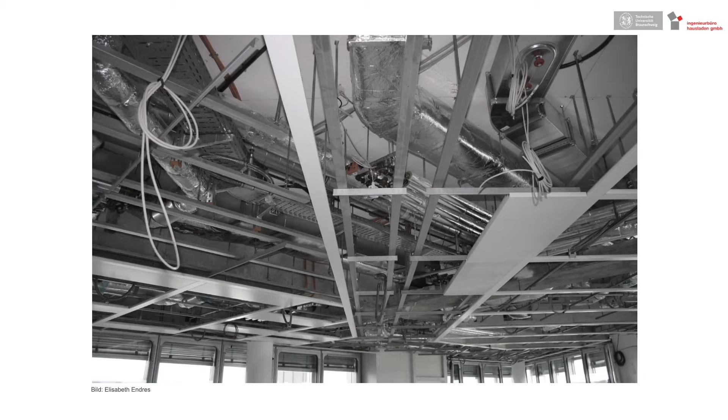I think there are two points why we are still doing architecture like this. By doing the professorship, I'm also always in the managing board of a company called IB Hausladen, and we are trying to avoid technical supply systems and have more talent in the architecture. But it's sometimes hard because there are not always high talents in the architecture, and robustness coming out of the plans, out of the floor plans, out of the height of the rooms and so on.

For that reason, we sometimes need technical supply, and on the other hand, we have a lot of requirements on comfort as well, what we as human beings need. So for me, when we go into monitoring and look at passive houses, for example, we always find that a lot of people live there at 24 degrees and more, and open the doors with a t-shirt on. I think it's very important nowadays to rethink about human requirements - what is comfort really, what is measurable comfort, and what is comfort from having a good surrounding.

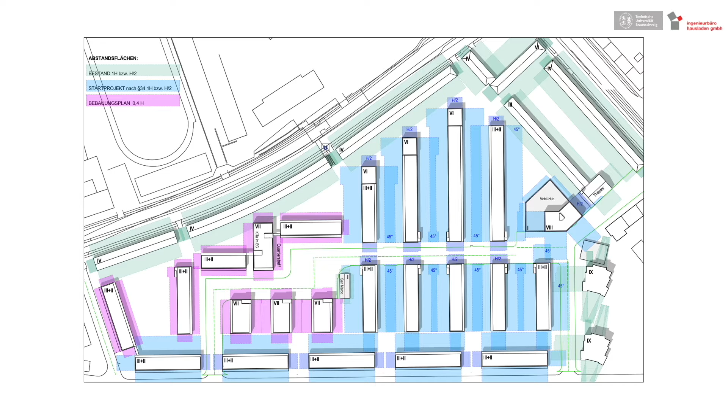This is a place in Munich, a 1970s residential building, and the question is what to do with them. You can see here a very normal district - we have hundreds of those in Germany, and there are qualities, but we always say there's no quality, and that a new building is always better.

I think we have to rethink that it's not always a solution to make a new building, but also to look into these quarters. And there are different qualities. You can do a lot of transformation over there without having a new urban law.

You can ask the people that are living there. They are very lucky to live there. They're living there for more than 40 years. But we, from the perspective of architecture and engineering, we always say, oh, they need too much energy, they are old, they have to be restored and so on. But if you talk to the people—I was sitting Sunday on the playground talking to people—they're very happy to live there. So it's also a quality.

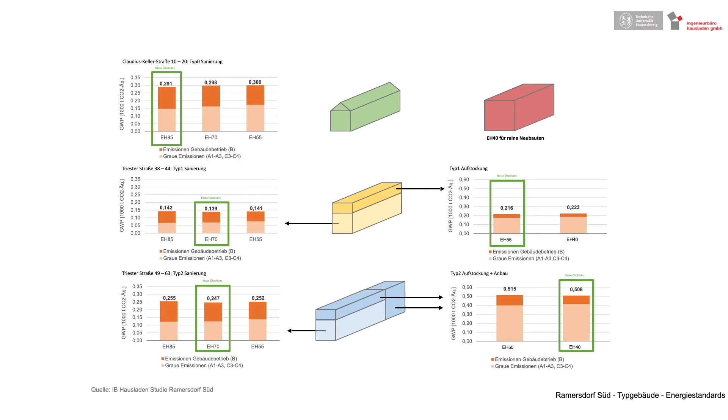When we go into these calculations, and what we got out from this study—a long study, more than 1 year we did—is that these numbers, like Energy House 54, 55, meaning the best standard you can have in Germany for existing buildings after refurbishment, is not the most ecological building when we do the right balancing with also looking at the embodied carbon footprint of the houses. So what we got out is that we are very close with all these EH 85 to EH 55.

It's very close, but we are always thinking just to get these numbers, not to talk about the qualities, to talk about the urban mind of these buildings and to talk about transformations. We are in Germany very focused just on those numbers, and I think we have to look to the right numbers.

And what we also got out of this, in the building sector, the biggest points are not insulation but coming out of the energy networks—making green networks and not a lot of insulation or transformation of the building. The highest potential is in the energy supply systems and in the energy supply network, so getting the last efficiency numbers. This is what I want to bring into this discussion about existing buildings.

Then on the other side is: what is the living place of the future in new buildings? This is a living lab we are doing together with 2 architectural offices: Bruno Fioretti Marquez and ZRS Architects.

Eiko Roswag is a colleague of mine in Berlin, and Piero Bruno, a colleague of mine at Uni Stuttgart. We are doing this with the offices as well as with the universities, and we're very proud that we won last week the DGNB Challenge for Sustainable Research. It's a one-to-one living lab.

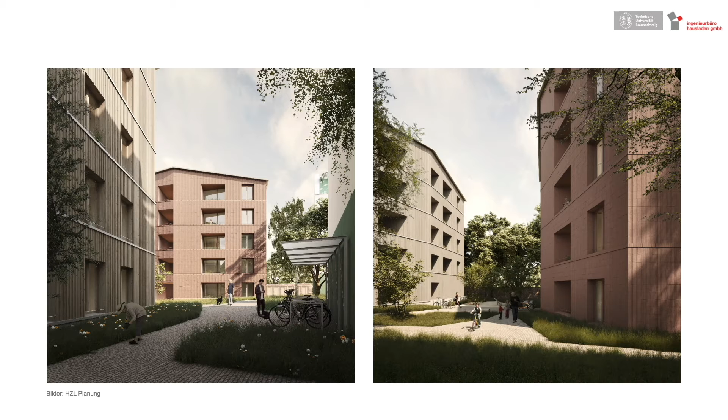It's under construction at the moment. One is made in wood and clay, and the other one is made in bricks—very traditional. We will have monitoring on comfort and on low-tech construction, and we had 2 goals: first, less technical supply system by having high performance of the architecture and high robustness; and second, just 20 to 25 square meters per person, so a very dense living space with good ground floor plans.

It was very hard to say we have no ventilation, no fan in this architecture, meaning each room is connected to the outside. So we need a window in each room, including the bathrooms. That leads us to very different architecture and very different ground floor plans. We have no fan, also none for humidity—you just open the windows. We have less heating systems; we're just working with clay panels on the ceilings.

We made it all a dynamic calculation, not just the static one at minus 12 degrees. We looked for a really good balancing in the structure, in the material, in the CO2, as well as in the heating and cooling load, and it is 100% CO2 neutral energy supply.

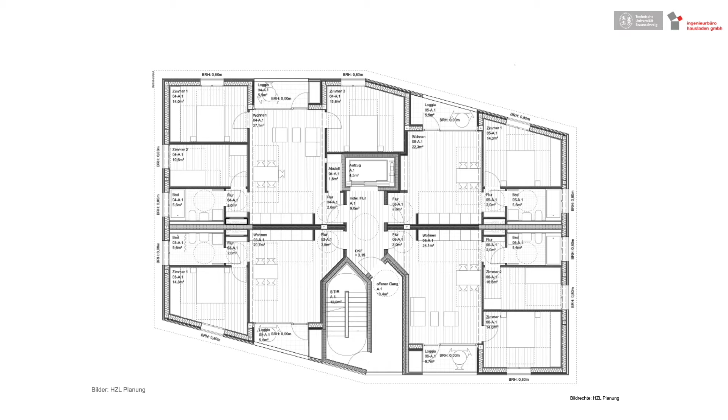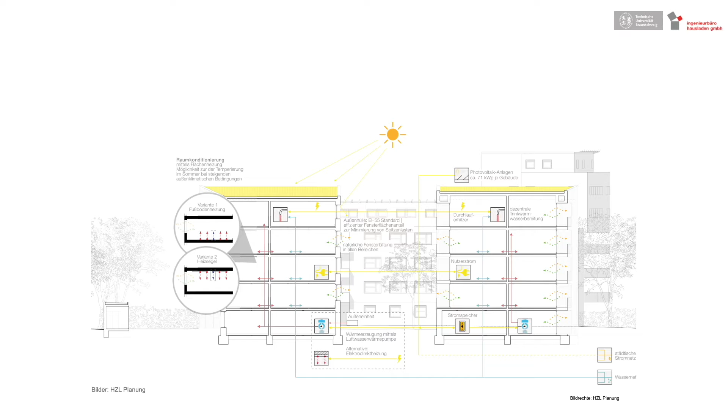But the highest issue was finding this ground floor plan I showed you before—what does it mean for the architecture? It looks so normal now, but it was really hard to achieve: having no underground floor, having storage, having a window in each flat or each room, and having just one apartment with 20 to 25 square meters per person.

We are now at 21, very happy to get this, and we will have monitoring to see what is happening.

So what does it mean to make robustness in architecture? What is the impact on ground floor plans? What is the layout of the architecture, and how does it look? What's important is also talking about the aesthetics of the future of architecture, and the role of architects. What we are discussing at the moment in Braunschweig is what it really means to be an architect, because it's about transformation, it's about working with existing buildings. So perhaps this is not anymore a building where I put my name on because I made it in a new way. The architect of the future is more like a transformer, working with existing design. I think that's very important to talk about, and also what is the aesthetic of architecture.

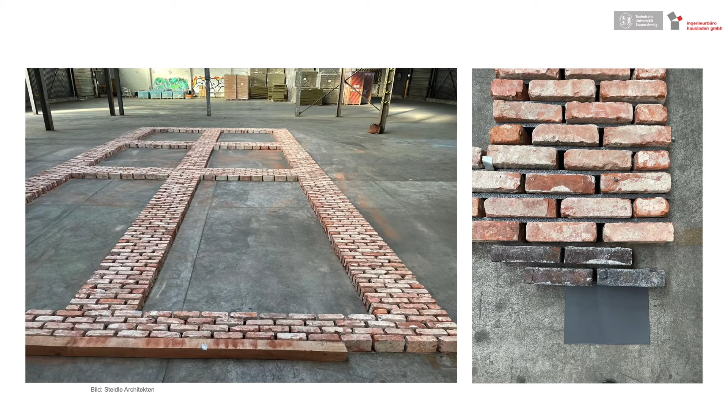This is a building in Hamburg. I was on the jury there for the Elbquartier. Steidle Architects from Munich won this competition because they came up with something different—it wasn't anonymous, there were presentations, and the architect came in with this brick and said it's 7 kilometers from here, and we have bricks for this volume of building for the facade system, and that is why we haven't made all the square meters you wanted. This is how they came to the architecture, and why they brought us this brick—it's from the old Holsten Brewery, being broken down at the moment. They said, okay, we have so many bricks, but not enough to make this big house you want, so your house has to be a bit smaller. So it has a very different aesthetic, of course. You'll see it is already built, or it was already built.

This is also the question of what is the aesthetic of architecture, what is the role of architects in the future, and the question of competitions—for example, what is the jury, what is the responsibility of the jury? Mr. Höing, the director of city development in Hamburg, we are always in charge after the decision. He took me to this one-to-one model for the facade and said, do you like it? What do you think? So it's not that we go home and say we won first prize and then I don't want to be in touch with this project anymore. I think it's very important to feel responsible for what you decided, also as a jury.

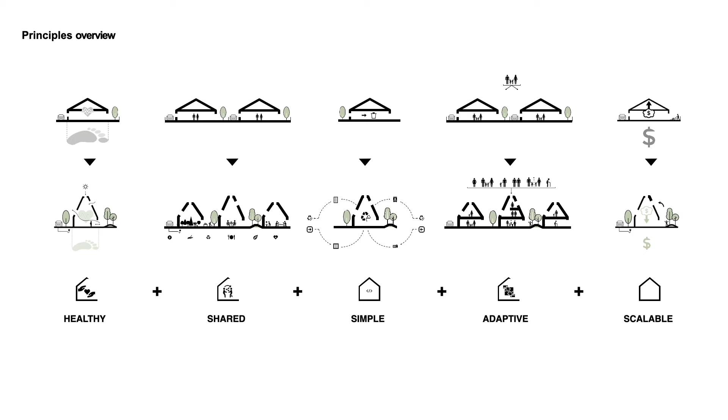So we worked for 3 years asking some of the deeper questions in relation to housing. How do we measure if our homes are healthy for the planet? How do we measure if they are healthy for people? How can we work with principles for shared living, so our homes make us part of communities that cure the loneliness and stress related to how we live? How can we build more simply to overcome the challenges of complexity in the building industry, where it's difficult to actually change things because of that complexity?

How can we develop solutions that are adaptive, both for different types of families and new types of families, but also adaptable for many types of urban situations? And how can we come up with solutions that are scalable, meaning affordable, so they can scale across the market? These were some of the bigger challenges and principles that we set out to work with.

But Boris asked me to show today how sustainable architecture becomes livable. So I want to start with the very simple principles we worked with to design the first prototype of Living Places.

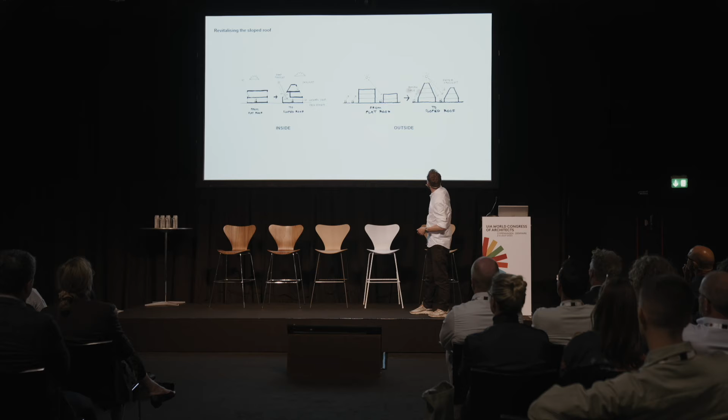We wanted to use the sloped roof to get a lot of daylight and natural ventilation into the buildings. Also using it at an urban scale, to ensure we get enough daylight between the buildings to support the life between buildings — both human life but also the life of plants. So that was a very simple new typology that we wanted to investigate.

So the prototype we did looks like this. It's realized here in Copenhagen, so you can go and see it. It's a small 3-story, one-family home with a big tilted roof, all based on bio-based materials.

Here you can see the living room looking from the kitchen, and you can see how most of the structure is based on wood — almost everything is bio-based materials, except for windows and foundations, which are steel. Here's the window with the double-high space where you get a lot of daylight in, which is also where you have natural ventilation bringing fresh air into the home. This is also where you connect to the upper stories, where the bedrooms are — this is one of the children's bedrooms, and this is the master bedroom under the roof.

All through the house, you can see how we've used nature-based materials along with lots of daylight and natural ventilation. This is the stair going from the kitchen up, and this is the double-high room on the second floor where you can also see the daylight coming in.

This is just to walk you through the house so you get an impression of how a sustainable, or more sustainable, home can look. But on a more technical level, we also worked hard to ensure we would lower the CO2 emissions of this building as much as possible.

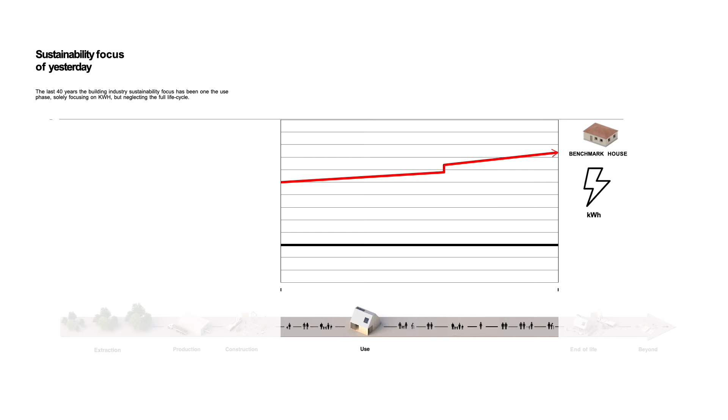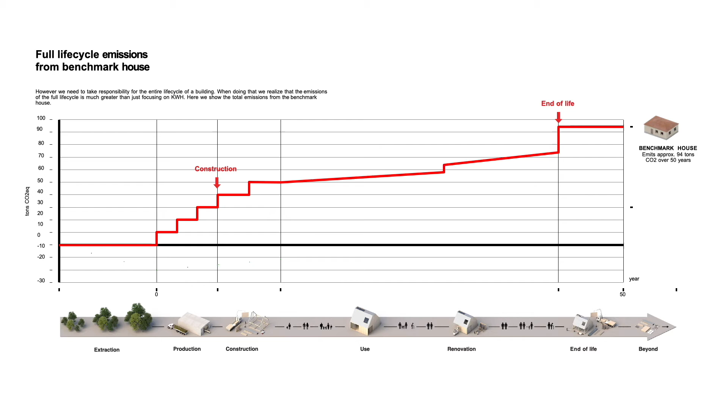What we have historically been looking at when we look at energy efficiency in homes is the operational phase, the use phase of the building. This is the sort of traditional benchmark house. But you can also see that where you have the most emissions is actually in the production of the materials and the construction stage, and then at the end of life, where we historically have just created waste out of buildings and not reused materials.

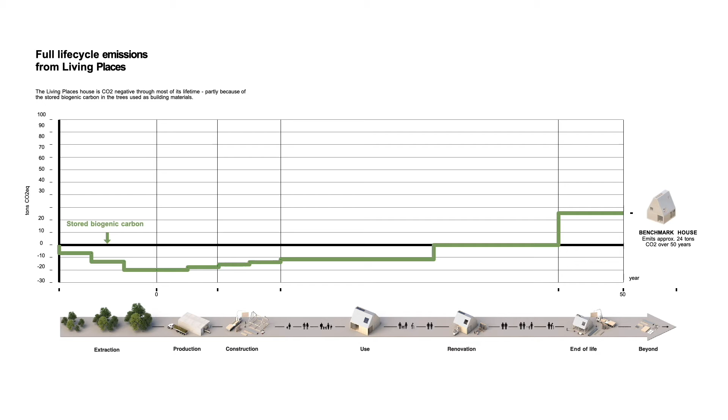So what we did was try to change all the components to bio-based materials. What you can see is that in these materials you store more carbon than you emit throughout the entire life of the building. Only when, as a calculation, you incinerate the building at the end of its life does it start to have serious emissions. But it's still much lower than the benchmark house.

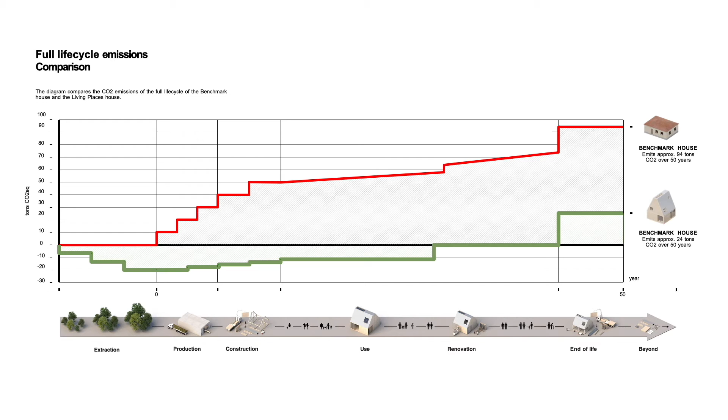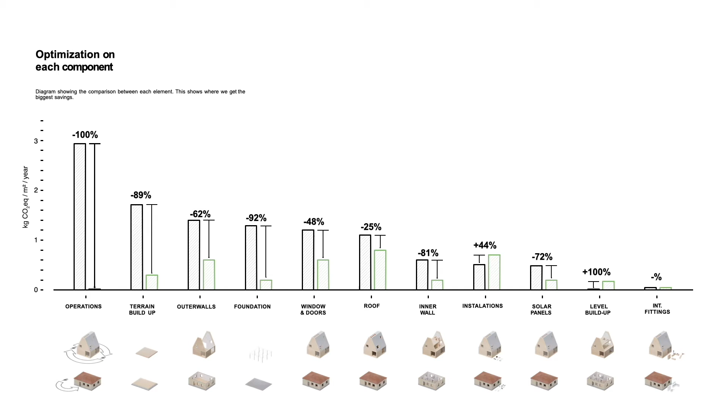So what we could see here is that just by looking at every building component in the construction, we can reduce the emissions for the entire house by 75%, and if you measure per square meter, it's around 66%, or two-thirds. I think that's an amazing finding, which shows us it's not rocket science, we just need to go back to common sense and start designing with life cycle assessments or CO2 as a design parameter. We need to look at every component throughout the process of the building, in the operation of the building, and in the afterlife of the building, and then we can get quite far.

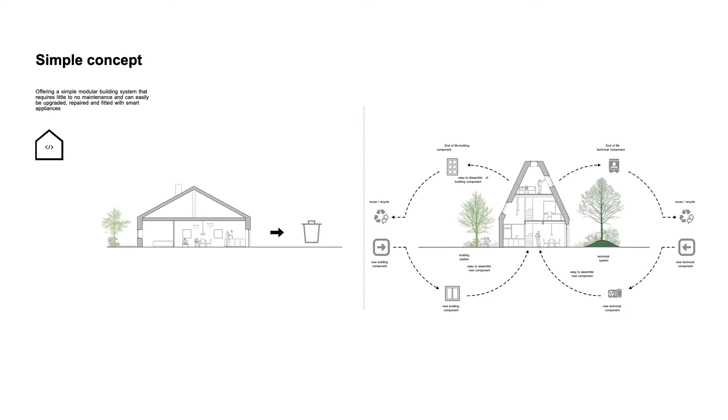We also designed this house so it's designed for disassembly. So all parts of this building can be screwed apart and actually put into use after the life of the building. We call that a dumb house with smart appliances. There are some smart appliances, the windows, the heating, the heating utilities as well, but it's a quite simple structure. We think that might be part of the solution to simplify the building so that buildings don't turn to waste after the end of life.

And that vision is now realized out here in Jernbanebyen. We invite you all to come and see it today or the next coming days and visit this place, because it's built there for us to share the solutions, and for this to be shared with the world, this congress in particular. But I also want to add another perspective to the challenge of building sustainable.

In this same period that we did this project, we also endeavored into asking, is this building actually within planetary boundaries? Is it actually sustainable on an absolute term? We didn't know, so we went out and asked a number of Danish scientists if they could help us measure this. With the words of Johan Rockström, what happens in the next 10 years will likely determine the state of the planet that we hand over to future generations. So we are really busy with getting this done.

So we set out to actually set some more specific targets with a number of universities supported by Realdania and the Villum Foundation. We had this paper made by the researchers that basically told us that in order to get within planetary boundaries, we need to reduce our CO2 emissions on a planetary scale by 95%. That's a lot.

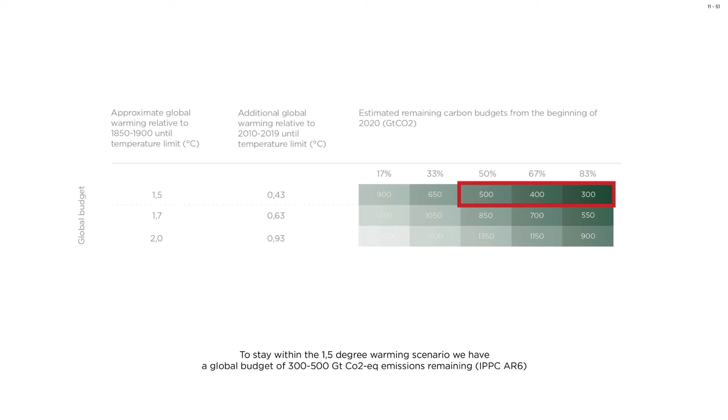And if we want to stay within the 1.5 degree scenario, we need to reduce emissions, or we have a budget of 300 to 500 gigatons, billion tons. That means we have around 6 years of business as usual before it stops. But if we can start reducing today, we can actually prolong that period a little bit.

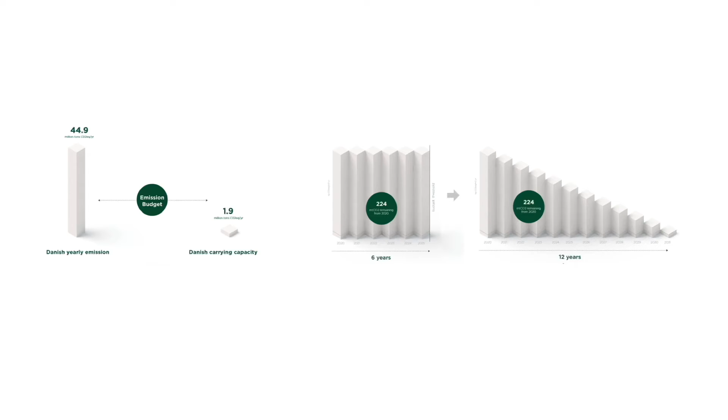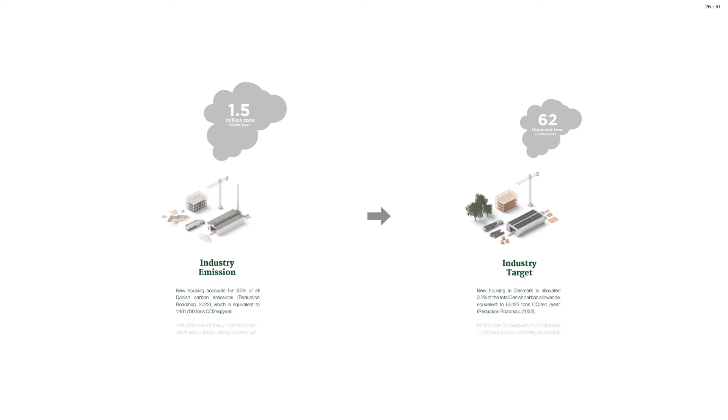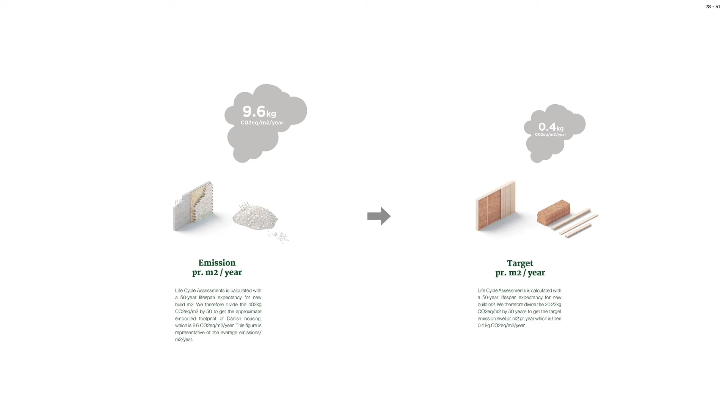So that gives us a target of where we need to go and a timeline we need to get it done within. Then, to allocate how much we can use for building, we made a very simple calculation on the allocation of the global budget to Denmark, according to the number of inhabitants, from the Danish national budget to how much we traditionally use for the new housing industry: 3.3% of the total budget. We divide that across the 3 million square meters we usually build for new housing, which gives us 20 kilos of CO2 per square meter, or 0.4 kilos of CO2 per square meter per year, if we want that to stretch over a 50-year calculation. It's a quite complicated calculation, but this is how we calculate CO2 per square meter per year in accordance with the Danish LCA.

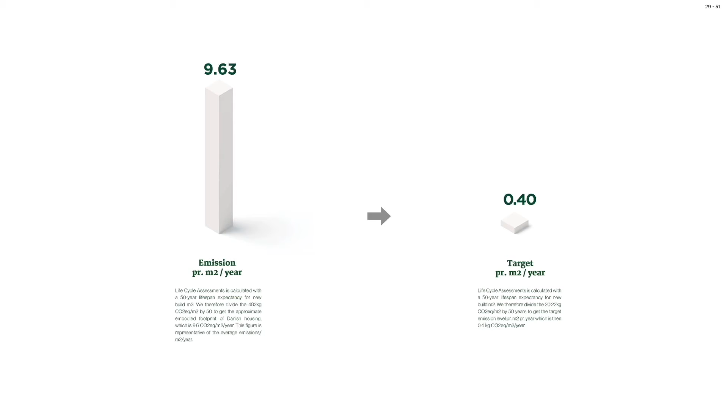So what we learned when we put this together is that if we want to be on the safe side with 83% likelihood that we support the 1.5 budget, we need to get there before 2029. We can also stretch it to 2032 if it's with a 67% chance, or if we can live with 50%, it's 2036. If we go beyond that, we are increasing the degrees to 1.7 or 2 degrees warming scenario.

So this is much lower than the Danish building regulation, and I think many building regulations are not even regulating the CO2 emissions. But that is probably the most important thing that we start measuring.

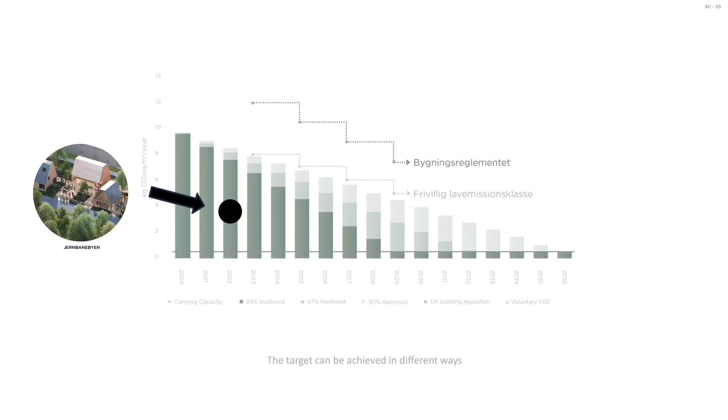As you can see, Living Places is well located within the Paris Agreement, but still a couple of... 3.38 kilos above the planetary boundary.

But when we then look at the course of emissions that I just showed you before, in these next 10 to 20 years, we're still actually at a minus, sequestering and binding more CO2 in this building than we are emitting. That means we can really look into, with more and more detail, how we can use the building industry in a clever way to both minimize emissions, but also help the buildings we do erect have the lowest possible emissions.

And that, I think, is the main message here. We need to be much more clever at understanding where our materials come from, where they are extracted, how they are produced and transported for when we use them in this period when we call them buildings, and where they go at the end of life, and also understanding where they come from on a global scale. That, I think, is something we're just learning to map out so that we can better understand the impact of what we're building.

And that's it. Thanks.

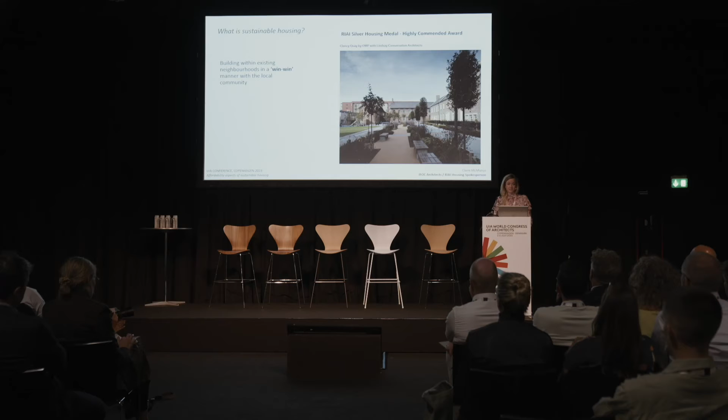And this is Dunluce apartments, which are villa-style apartments on Anglesey Road in Dublin. Anyone who knows that part of Dublin will know this is a road of very large houses, many of them embassies, each on a large site. So this is an exemplar project of how to deliver density in an area like that, that's sympathetic to the receiving environment.

The win-win manner is particularly important in Ireland because we have very strong third-party rights. Anybody can object or appeal a planning application or decision, and anyone can delay it for up to one and a half years, and may actually stop it. So the win-win approach is obviously what we should be doing, but it's extra important in that context.

I'm conscious of the time, but people who know Ireland may have noticed that those winning schemes are all in certain parts of Dublin, quite wealthy parts of Dublin, and you might ask the question why.

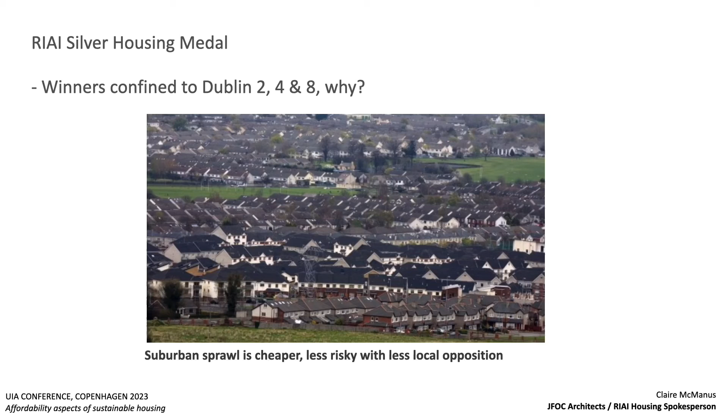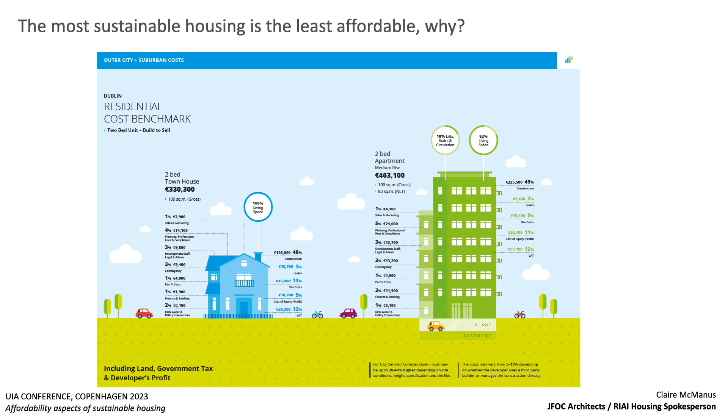The answer is that suburban sprawl is actually much cheaper. There's much less risk involved and less local opposition compared to compact growth. This slide describes why: the per square metre cost of a house is lower than the per square metre cost of an apartment block. In the case of an apartment block, you need to deliver 100 square metres of apartment building in order to get an 83 square metre apartment, whereas 100% of your building in a house is that home.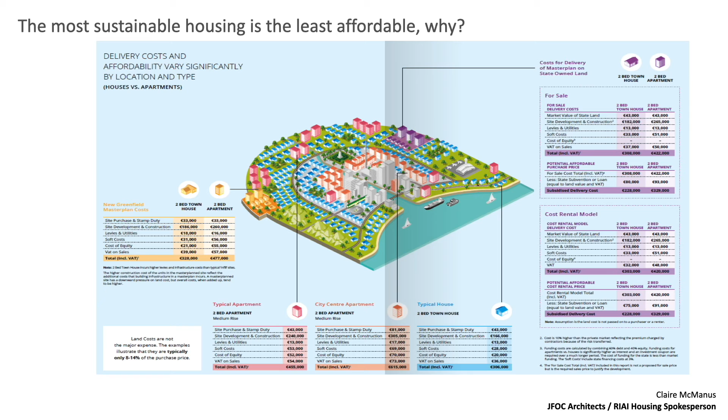This slide shows how the closer you get to the centre of a town, city, or village, the more expensive construction is. Houses built in green fields cost less to deliver, and they're worth more money than virtually anything else.

We talk a lot in Ireland about trying to develop over the shop, which is often abandoned and run down, and to turn that into homes. These tend to be quite expensive projects. They tend to all be unique, and you tend not to know what's going to be involved in the project until after you've started. So there's a good bit of construction risk involved, and it's very hard to scale.

Conversion of historic buildings, for similar reasons, is quite expensive. There's a lot of risk involved, and often the regulation doesn't match the building very well, so there are inefficiencies.

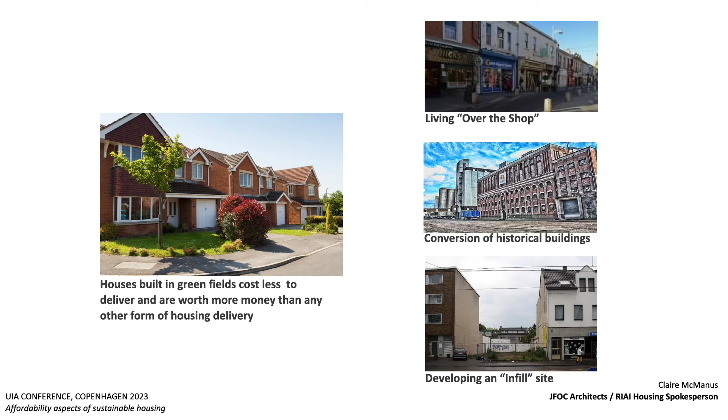Equally, an infill site has issues and unknowns, such as trying to build up against other buildings. You don't know if you can use those walls from a structural or legal perspective. So there's a lot of unknowns and risk, and you might have nowhere to put your site compound, meaning you might have the cost of renting somewhere else for that.

Just to run through some of the points I might have missed: the site costs for compact growth are much higher. Sites are smaller, with less economies of scale. You might have to demolish existing buildings, deal with poor site access, etc.

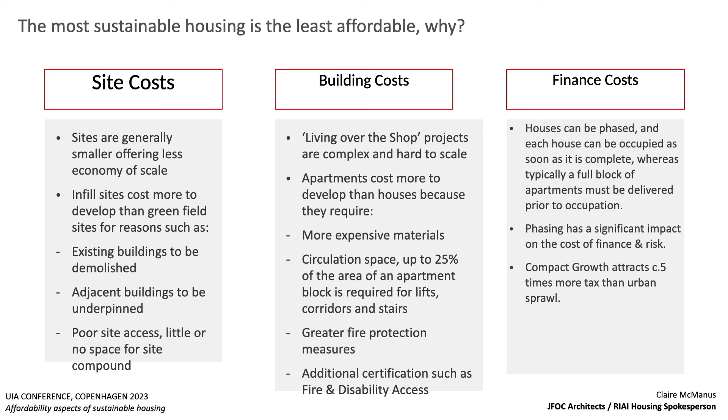The building costs also tend to be higher. You've got more expensive materials and circulation space to deliver in the case of apartments, which doesn't happen for houses. Also in Ireland, fire protection measures are much higher for apartments than they are required to be for houses, so the material costs are higher.

And then there are finance costs as well. In the case of a multi-unit housing estate, you can deliver each house one at a time and sell it, so you can phase it in a very cost-effective manner. Whereas with an apartment scheme, you have to deliver all of the apartments attached to a particular stair and lift core before you can sell that portion of the project.

And on the bottom right there, you can see—sorry, I don't seem to be able to go back—but I just mentioned something about tax. The tax is 5 times higher on an apartment scheme compared to a housing scheme, on a site of the same size. That's just a function of the amount of dwellings you can fit on the same site with a higher density scheme versus a lower density one. But it still doesn't really make sense—how can this be more economical?

The reason is that only some of the costs and benefits of housing are being counted in the Irish context. We're counting delivery costs, sales values or rental yields, and self-selected local opinion. We're not counting a lot of the stuff that's come up across this conference and will come up in the next few days—a lot of the stuff we say matters. For people, we're not putting a cost on shorter commutes, better public transport facilities, potential for better placemaking and stronger communities, and the win-win potential where you bring new housing into existing neighbourhoods.

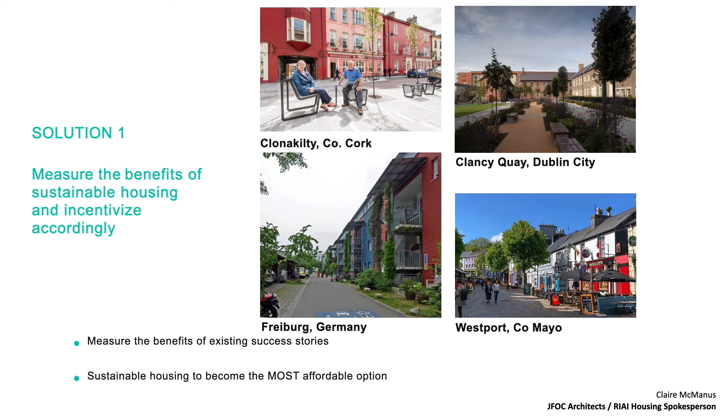So, coming to some of the solutions. Solution 1 would be to measure the benefits of sustainable housing and provide incentives accordingly—look at where this has been done well and incentivise it. If you measure all of this stuff that's not currently being counted properly, sustainable housing can become the most affordable option.

So measure the benefits of adapting existing buildings: the cultural historic value, the social value, safety and passive surveillance of bringing empty buildings back into use in the centre of towns or cities. There's an example of that which has worked—no major surprise, it's in Dublin, where it's been possible to deliver an adaptive reuse of a building. But if we measured all of the benefits, it should be possible everywhere.

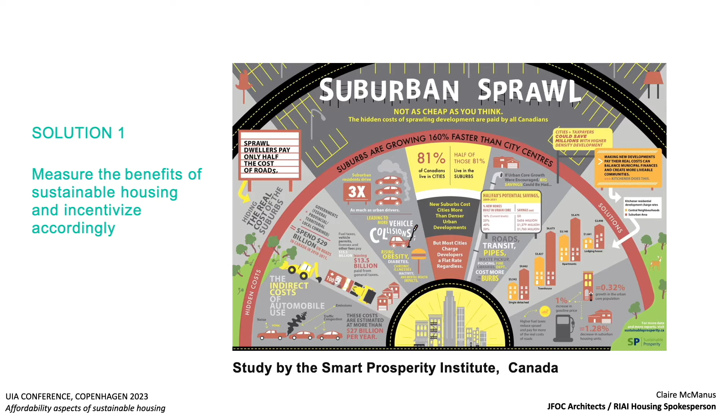This is a study by the Smart Prosperity Institute in Canada, which showed that in a higher density scenario, the cost to service is much lower compared to low density. If it's infill or converting existing buildings, you reduce the per capita cost of servicing a particular area. The same study has all kinds of other elements—I don't have time to go into them today, but one example: in Ireland, the average annual cost of running a car is €10,000. So if you're building somewhere where a family can survive with one car instead of two, or with no cars, that's a lot of money that can go towards rent or a mortgage.

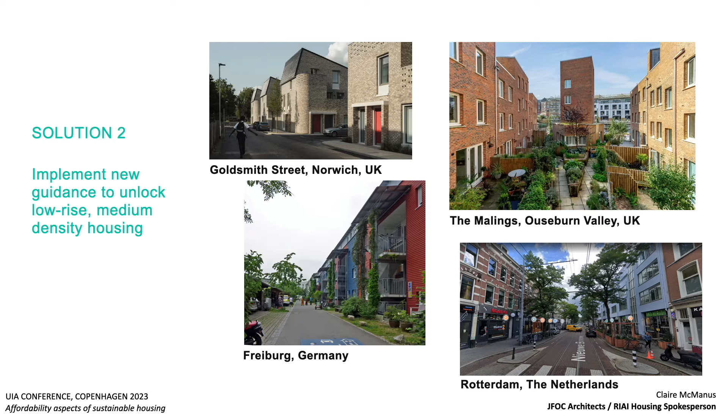Solution 2 is to implement new guidance to unlock low-rise, medium-density housing—that's happening at the moment in Ireland. When we saw that earlier graph of houses and apartments, what tends to happen is that to meet density requirements, planning applications include a mix of housing, which is affordable and viable, and apartments, which aren't. Then the houses get built and the apartments don't, and there's maybe a change to the planning application to replace them with houses—so we end up with suburban sprawl all over again. This new guidance would cover 2, 3, 4, 5-story apartment buildings and houses with smaller gardens, sitting between high-cost apartments and low sustainable housing.

And finally, solution 3: we need to create a shared vision of how the future should look. We've had a lot of success in Ireland with the Citizens' Assembly concept, where 100 citizens are brought together and educated in depth on a particular issue. We had it with marriage equality and abortion rights over recent years in Ireland. Maybe we need something similar to really start a conversation about how the future should look.

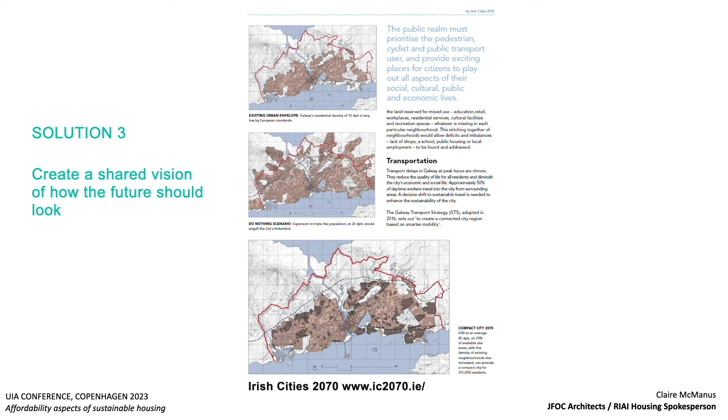Just very finally, a project by the Irish Cities 2070 group looked at Galway City on the west coast of Ireland. The top image shows the footprint of the city at the moment. The middle image shows how it would look if the population tripled under a business-as-usual, viable, affordable manner. The bottom image showed what compact growth would look like, and it's well worth looking at. They have lots of nice images of how Galway could become this walking 20-minute neighbourhood, sustainable, compact city into the future.

So thank you very much for your attention.

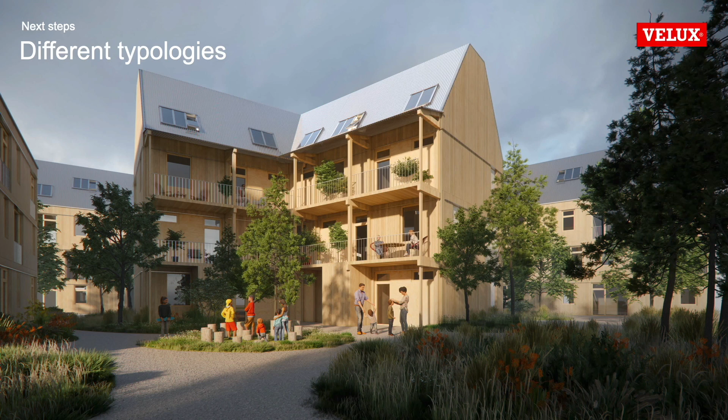Sorry for being a bit of a politician there. But I think a project like Living Places hopefully shows that it's possible to set ambitious targets as an industry. We are able to deliver, we want to deliver. So it's also an invitation to politicians to put the bar high.

Just a small side comment, but right now we're also working on the option to put Living Places in a city in Ukraine, because there are others who want to do it too. We want to do it, and we need to help rebuild Ukraine. So let's see if we can make that happen.

More in general, wherever you're based, let's drive the development of our future living places together. We can achieve so much on a global scale by partnering up, sharing knowledge openly, and working across different disciplines of the building industry. So thank you very much for that. Thank you.